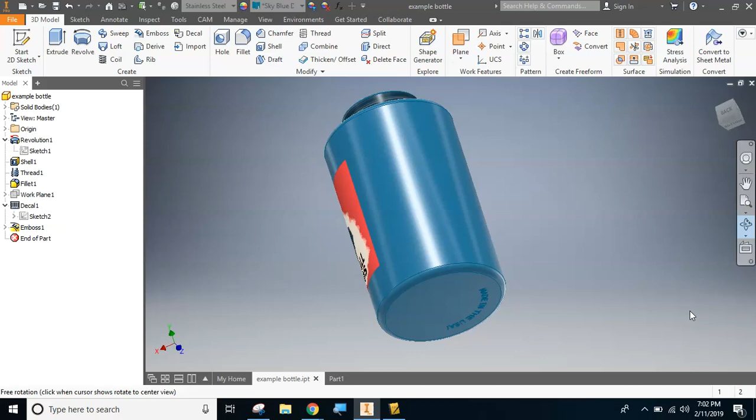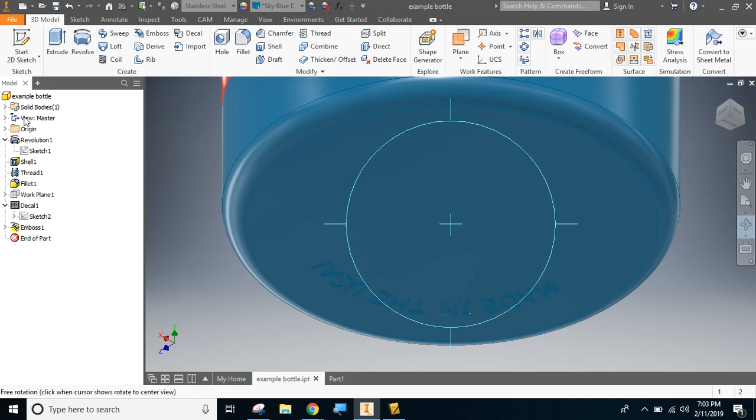In this one, we are going to make this water bottle that's spinning around on my screen. We're going to learn a couple new things here. If you look at my model bar, you can see a few commands maybe you're not familiar with. We're going to put some threads on the neck of the water bottle, use a decal command, and create an embossed surface on the bottom that follows the curve of the shape instead of being text in a straight line. So that might be something new for you at the end of this video as well.

I'm going to start off by showing you the sketch that I started with to create my revolution, or my water bottle outline. You might want to pause it at this point so you can create the same sketch. This is half the profile of the water bottle. We're going to revolve it around when we're done, so feel free to pause.

And if you paused it, welcome back. I'm going to go to my part one. This untitled part is where I'm sketching stuff out. You'll notice I've got my water bottle created with square corners. I'm going to use the 2D fillet tool to apply 1/8 inch radiuses. There's my first 1/8 inch fillet, my second 1/8 inch fillet, and here's my third 1/8 inch fillet down at the bottom.

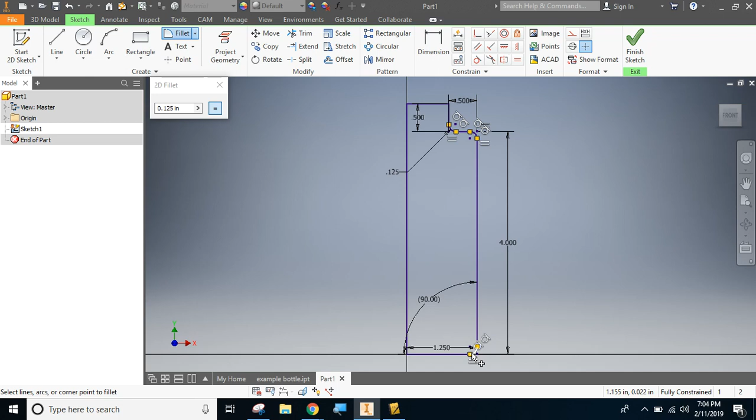Now I can say finish sketch, and we'll zoom extents. Hopefully the revolve tool is not a new one for you - it automatically picks your closed profile, and then we just click on the axis we want it to revolve around. So there we've got a revolved water bottle.

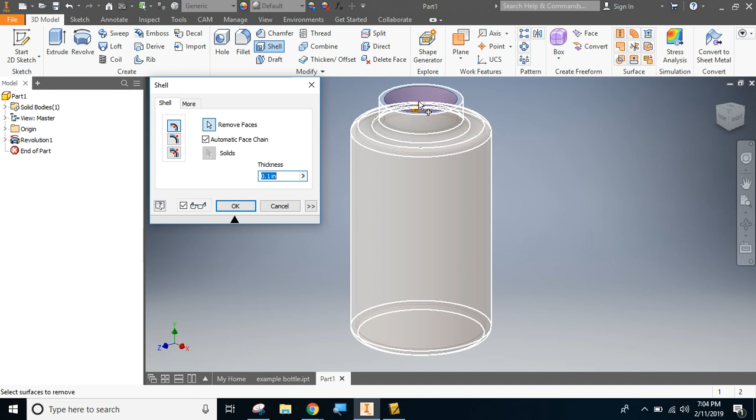The next step is to shell it. Shelling shouldn't be too unfamiliar - hopefully it's something you've done a few times. You can see in my preview it's hollow on the inside, so I just need to click the top surface here because that's what I want to remove, and then I'll say OK. Now I can tip my water bottle down and see into it that it's hollow.

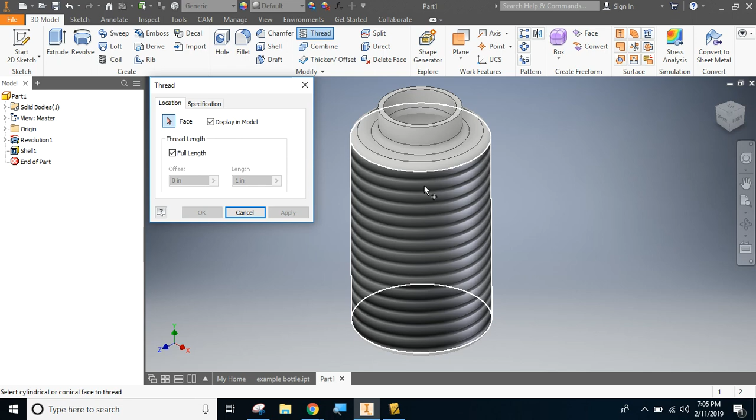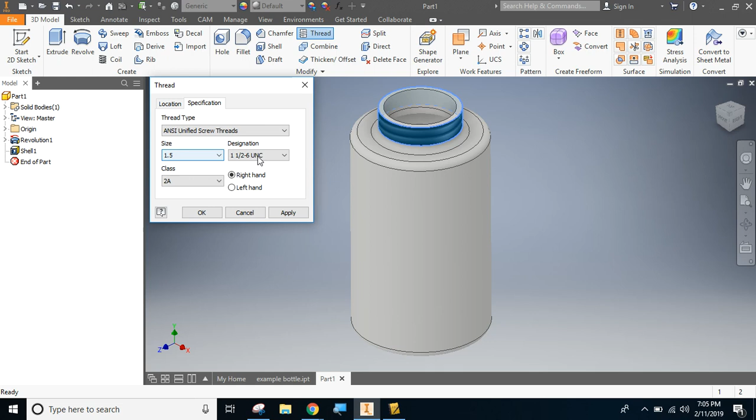Then the next command will be new for you. We want to apply some threads to the neck of the water bottle. On the modify command, I'm going to go to the thread tool. The first thing it asks me to do is pick the face of my water bottle I want to add threads to, so I'll click on the neck. Now all we really need to do is click OK, but I want to show you that it automatically sized the threads to the diameter of this feature. Since we created a 1.5 inch diameter neck, it put some 1.5 inch number 6 UNC threads onto our project. So if you were reverse engineering a water bottle and needed these male threads to meet up with female threads, you'd want to make sure when you design the water bottle cap, it also has 1.5 inch number 6 UNC threads. We're just going to click OK and continue on in our video.

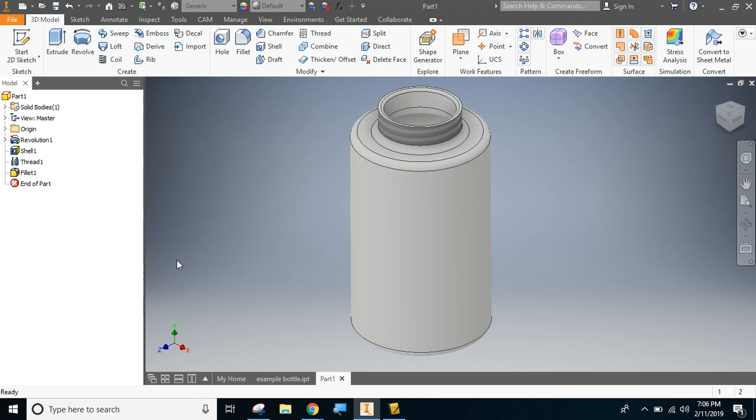The next thing we want to do, to give our water bottle a little more finished appearance, is fillet this top edge at 0.05, or 50 thousandths of an inch, just to round it over and make it look a little smoother for drinking out of. So we'll click OK.

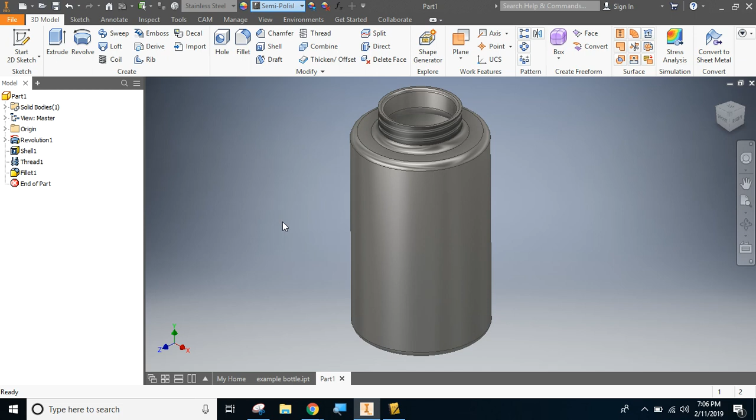The other thing we can do at this point to make our water bottle look more lifelike is assign a material and a color to it. I'm going to choose stainless steel - that'd be a good material for a water bottle, it would hold water and not rust. Then you can go ahead and choose a color you'd like it to be, and I might go with red for this particular water bottle.

Now if we look back at our example water bottle, I'll get out of sketch mode so we can look back at it - you can see we've applied this fillet. The next thing on my model bar is this work plane. The way decal works, I'll go into my sketch for this decal - you're going to find an image, apply that image in sketch mode as a flat image, and after you finish the sketch, you'll use this decal command to apply it.

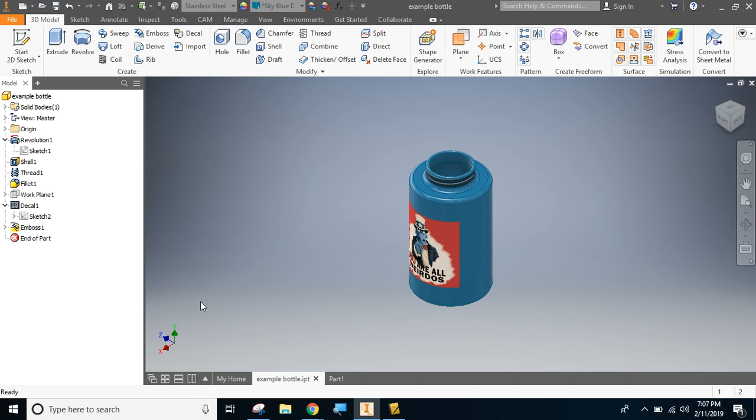The first thing we need to do before we can even go into sketch mode is find ourselves an image. I'm not going to do Uncle Sam on this one, I'm going to pick a Spartan head. I like the looks of that Spartan head.

I'm going to right click on this image, go save image as, and save it on my desktop. Now I've already got one there, so I'm going to save over top. You'll probably save this as a brand new image.

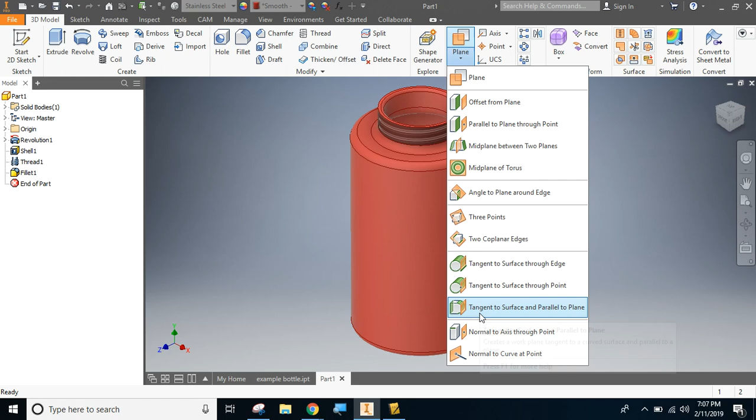Now I need to create a sketching plane on the outside of my bottle. I'll click the drop down under plane, and I like using tangent to surface and parallel to plane. I'll come over to origin, pick the plane I want it parallel to, then click the surface I want it tangent to. We can see it applied it on the back, but since this is a round object, it doesn't really matter where that work plane ends up.

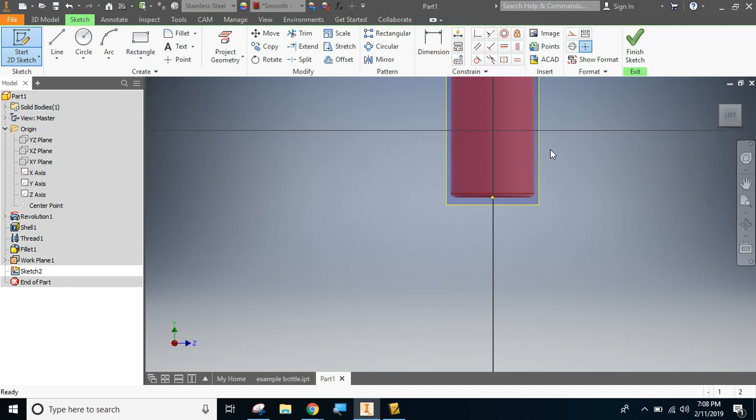So now I'm going to start my sketch. I've got a flat plane, not a round plane, but a flat plane out in space. I'll go up to insert and say I want to insert an image, then pick out the image I want to insert, and go open.

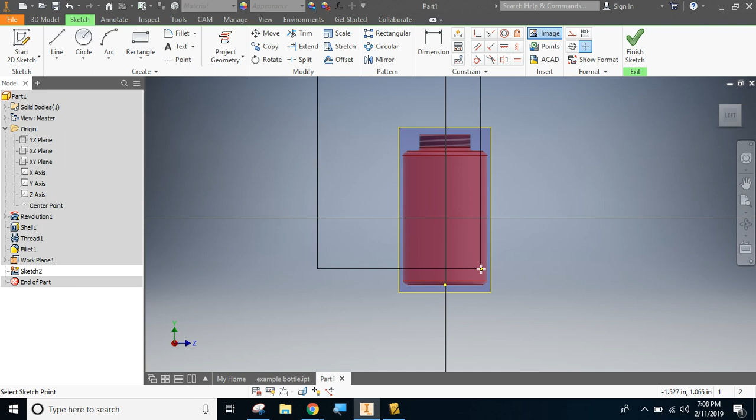You can see in the preview window here, this Spartan head logo is much larger than my water bottle. So if this is the case for you, if you picked an image with a lot of information, you're going to want to use the scale tool to scale that down.

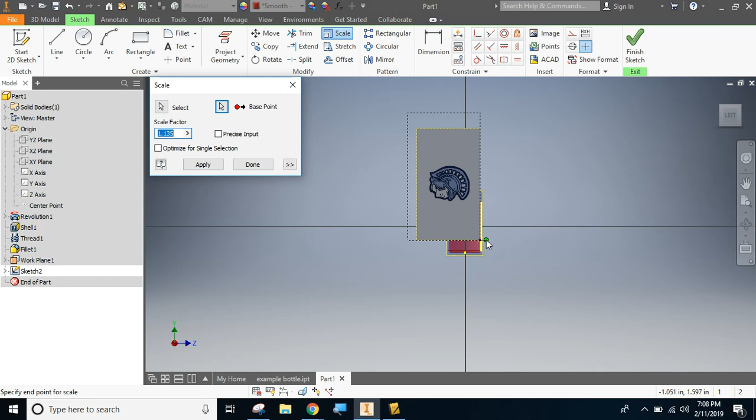I'm going to select my image by clicking and dragging a box around it. It wants to know where I want the base point for my image to be, and I'm going to say no. All right, we'll try this again. I'm going to click escape and get into my scale tool. Again, I'm going to select.

Maybe this time I'll choose this base point out in space. It says it's constrained to other geometry, and I'm going to say yes, and hope for the best here as I scale this down. Now it says what scale factor would you like, and I know I want it to be smaller, so it's going to have to be less than one.

On my screen I'm pointing to it right now, but you can't see it. I've got this little dotted line, that's how small mine's going to get. I think I want it a little smaller than that, so I might even go with a scale factor of 0.3. Yeah, that looks kind of too tiny. We'll go 0.4 for this one, and I'm going to apply.

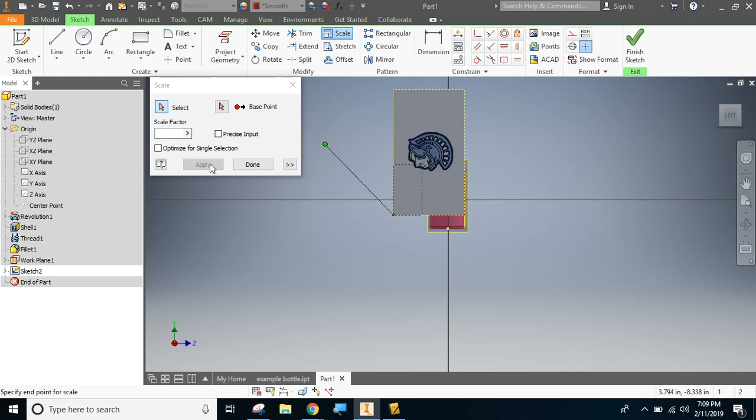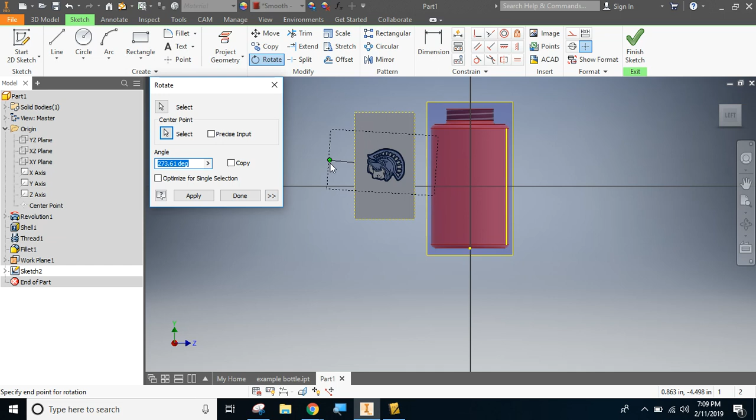So now I've got my Spartan head logo out in space. The only issue I've got is it's not going the direction I want. So now I'm going to use the rotate command, and we'll select by drawing a box around it. We'll pick a center point this time, and I'm going to rotate this object the direction I want it to go. I'm feeling pretty good about my Spartan head being there, so I'll say done with my rotate.

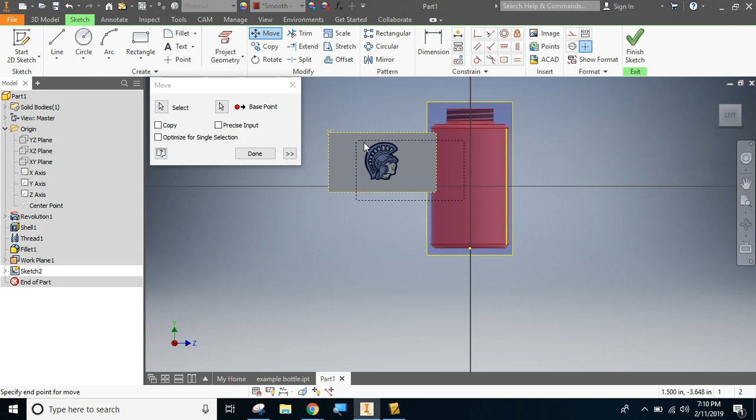The last thing I might do is pick my object now to move. I don't use the move very often, so you'll have to bear with me here. I'm going to select it, pick my base point, and then I'm just going to drag it and drop it about centered on my water bottle. I'm feeling good about that, I like the way it looks as I'm evaluating here.

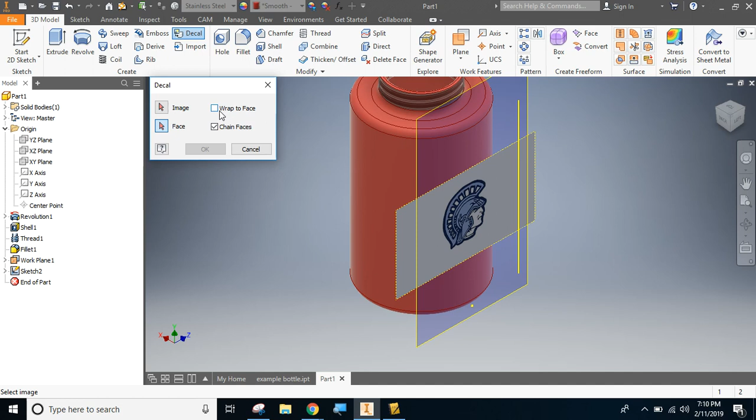So I'm going to say finish sketch. Now we'll go up to the decal tool, and I'm going to choose my image, then choose my face, and since it's a round face, I'm going to say wrap to face.

My computer's running a little slow here tonight. At this point it should let me say okay, but it's not. I hope your computer doesn't glitch out when you get to this point. It won't even let me cancel it, so I'm going to cross my fingers this works.

I guess we're just going to have to wait. Mm-hmm.

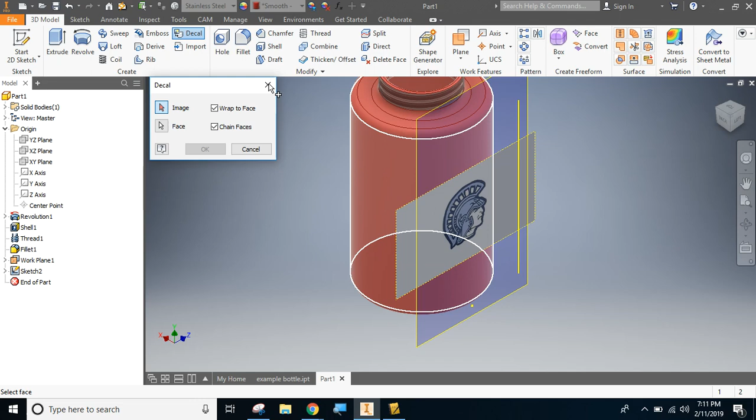That was my son in the background. He wants a snack. Oh no.

Oh no, all right, it appears as though Inventor has disappeared from my screen. So I crashed Inventor. All right, I am going to stop this video and I will make a part 2, hopefully picking up where I left off. I apologize for my technical difficulties.